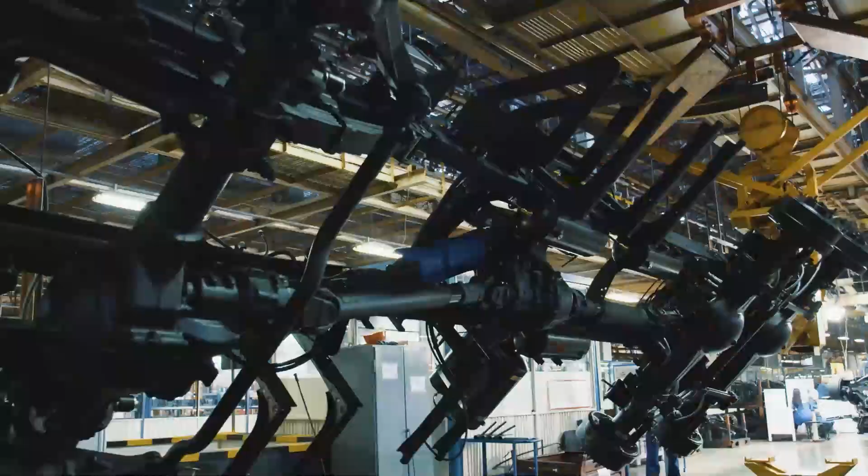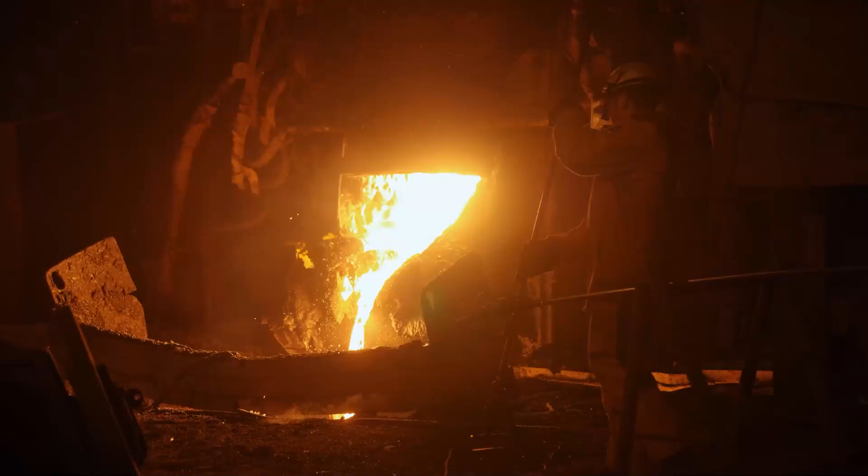In the world of today, steel products are used by many markets, from automotive to bridge and shipbuilding. Our Earth provides raw materials for those steel products. Through several stages, these materials are turned into basic products such as beams, plates, and tubes. For durable and reliable constructions, these products must be processed as well as protected against corrosion.

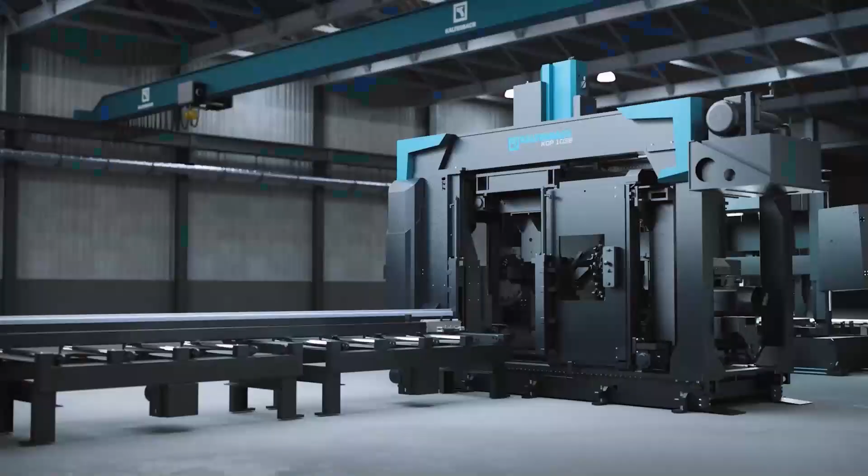To do so, KALTENBACH supplies integrated, high-quality solutions for the steel industry. May we present KALTENBACH and its solutions.

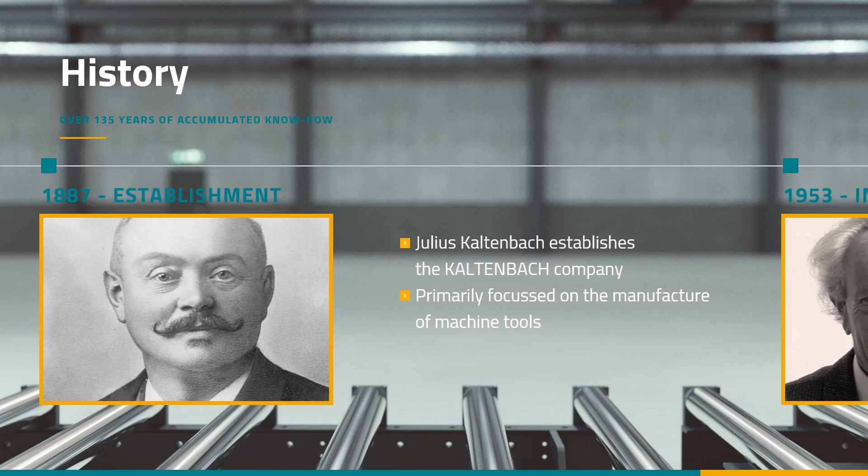History. KALTENBACH was founded in 1887 by Julius KALTENBACH. 135 years of history in the steel business, with no compromises in durability from day one.

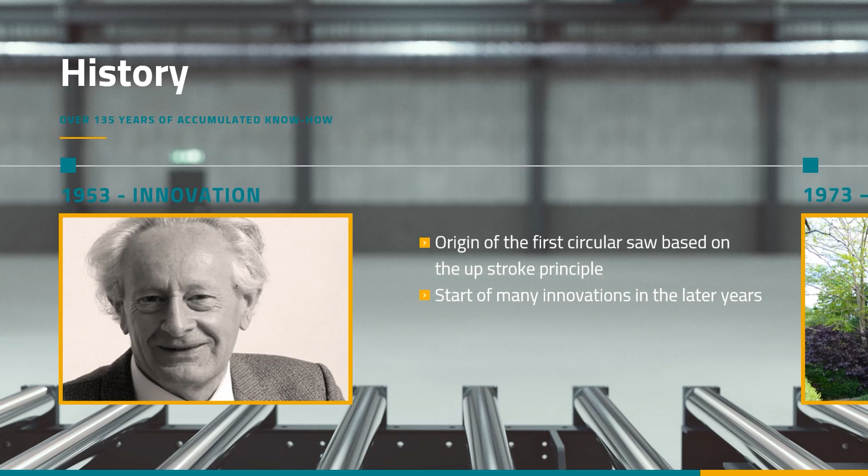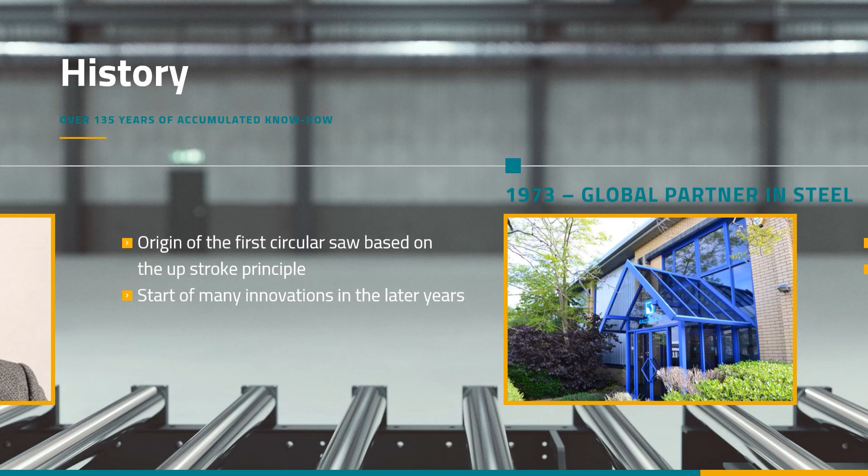In 1953, KALTENBACH evolved as an innovator, which began with the creation of the first circular saw to use the patented upstroke principle. It was the start of many innovations for the steel processing industry, from drilling and coping to

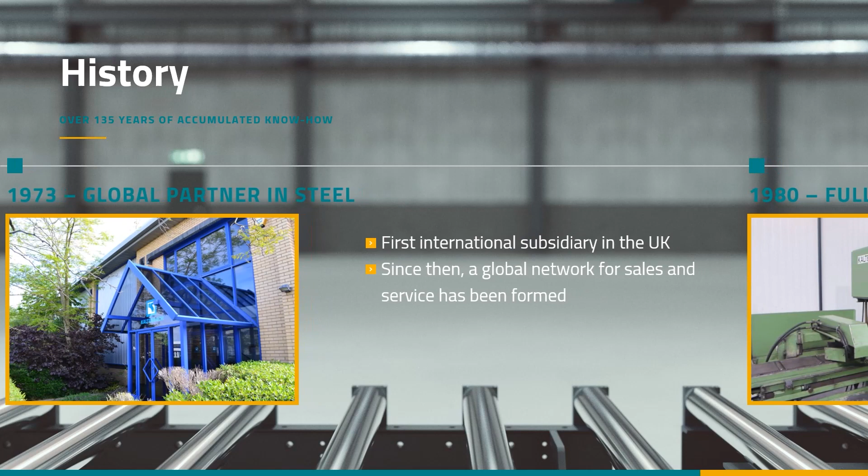shot blasting and painting. In 1973, KALTENBACH established its first international subsidiary in the UK. This has grown into a global network for sales and service that enables KALTENBACH to serve its customers around the world.

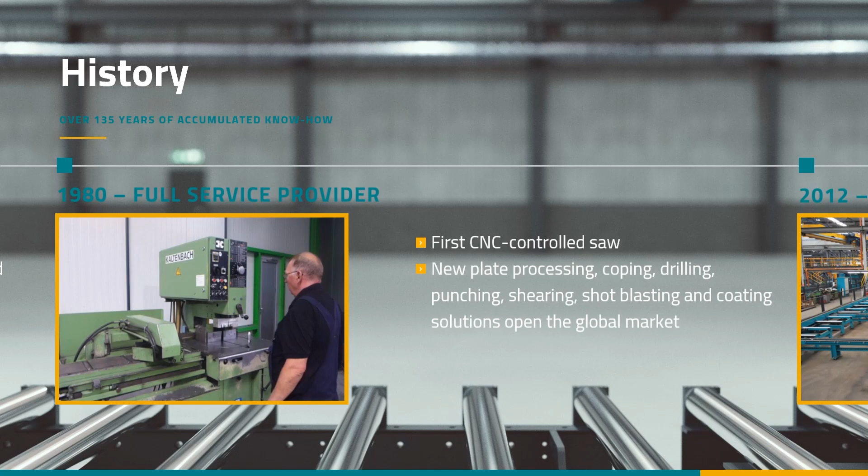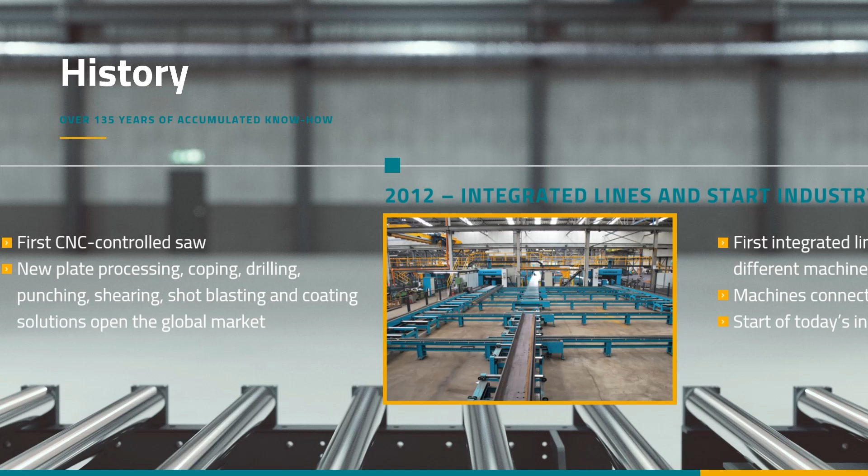In 1980, KALTENBACH became a full service provider by creating products like the first CNC-controlled saw. New solutions for plate processing, coping, drilling, punching, shearing, shot blasting and coating opened up the global market.

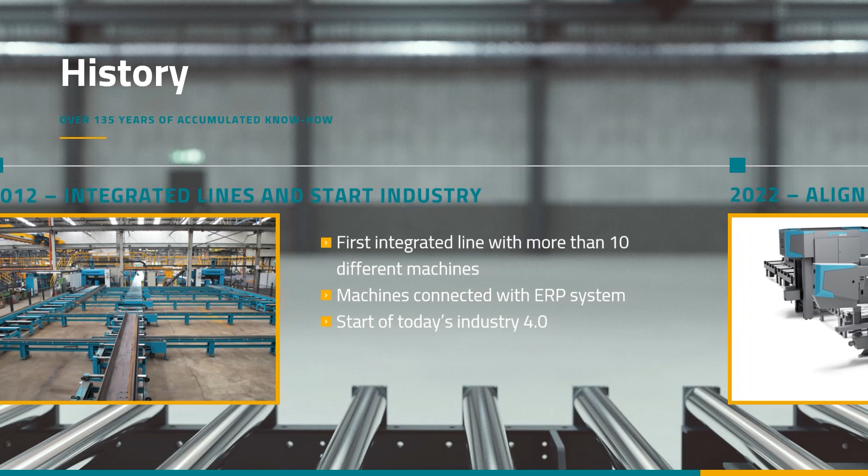In 2012, KALTENBACH delivered the first fully connected systems which could be integrated into the customer's ERP systems. These game-changing production lines allowed customers to process steel fully automatically. KALTENBACH was ready to partner for the future.

We wanted to modernize as well as improve our machines, durable and robust, with considerable savings on energy and consumables. Our goal is sustainable production at the lowest possible operating cost for our customers.

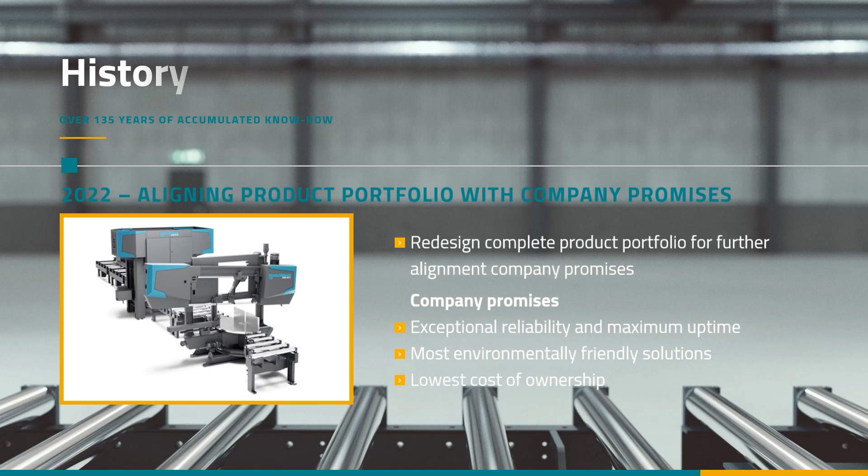Our specialists in Lörrach and Hengelo, as well as our sales centres and partners, are ready to offer advice and support all over the world. We are there wherever you need us.

Over the years, KALTENBACH has become a technological leader and innovator, known for its powerful solutions and passionate people. Processing steel is our pride. We are driven to protect and guarantee the quality, reliability, and durability of our customers' products.

Every day, we continue to improve the sustainability and reliability of our products. Our drive and pride is to process steel and to protect and guarantee the quality, reliability, and durability of the products of our customers. Every day, we continue to improve sustainability and reliability in all aspects.

With the help of our passionate people, we promise that our solutions are exceptionally reliable and have a very high uptime, are the most environmentally friendly, and offer the lowest cost of ownership.

Markets. At home in your industry, the individual opportunities in the steel industry are essential for the success of your business. From automotive industry to crane building, from locksmith shops to steel service centres, our experts know your business and the challenges you have to face every day.

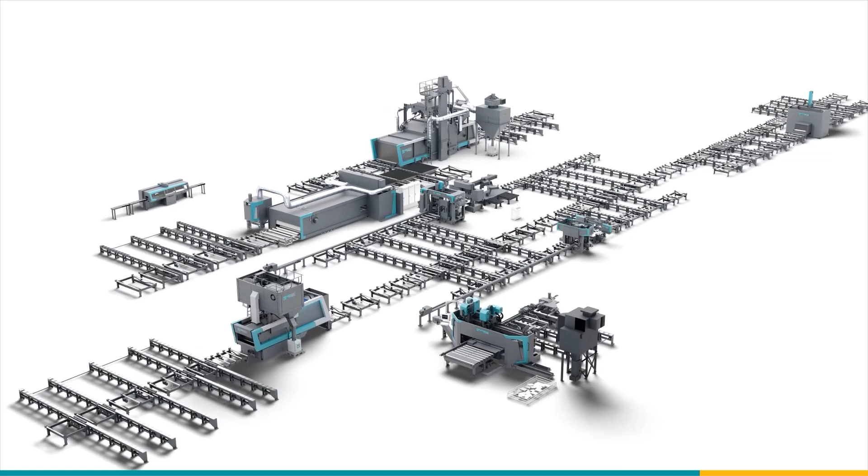KALTENBACH's drilling machines offer the highest drilling performance, delivering efficient and accurate milling of notches, chamfers, slots and pockets. Thanks to its powerful drives, high torque and fast rotational speed, you'll be getting the very best KALTENBACH has to offer. Perfect drilling and machining.

Benefits include the highest processing performance in its class, with its 500mm sub-axis for parallel processing. Complete processing of material and lowest cost of ownership guaranteed.

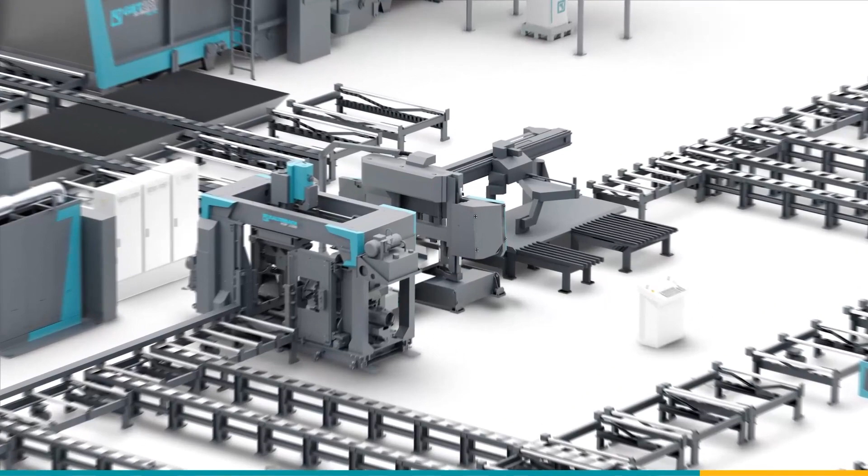From straight, miter to multiple overlapping saw cuts at different angles, KALTENBACH will have the perfect saw for your business. Fast and reliable sawing.

Benefits include state-of-the-art cutting performance combined with auto feed control technology for fastest cutting with longest tool life. KALTENBACH's bandsaws offer the lowest cost of ownership and are Industry 4.0 ready.

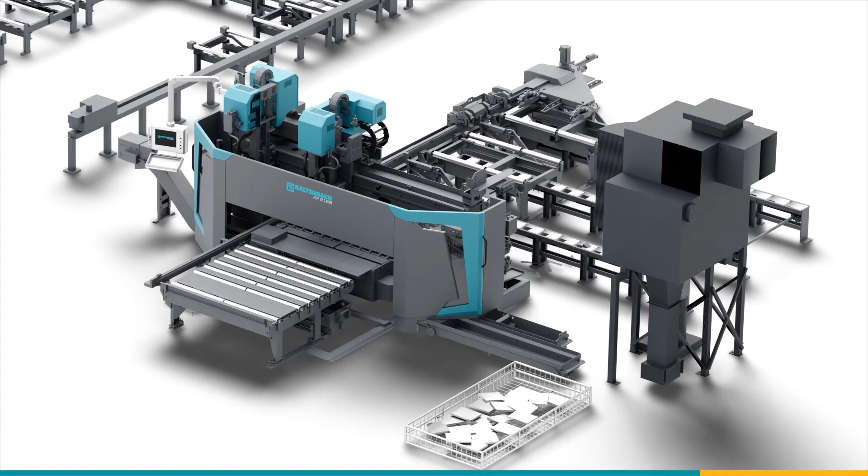The KF series offers multiple technologies in one machine, giving you the freedom to produce your plates in the most efficient way. The high level of automation of KALTENBACH's plate processing machines will boost your productivity and profitability. Advanced plate processing.

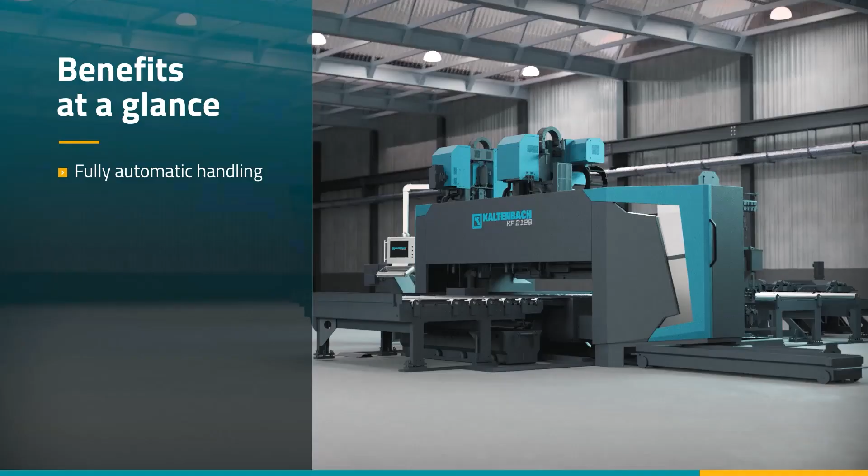Benefits include fully automatic handling, making the KF series highly efficient and suitable for cost-effective production whilst offering maximum performance and optimal cutting quality.

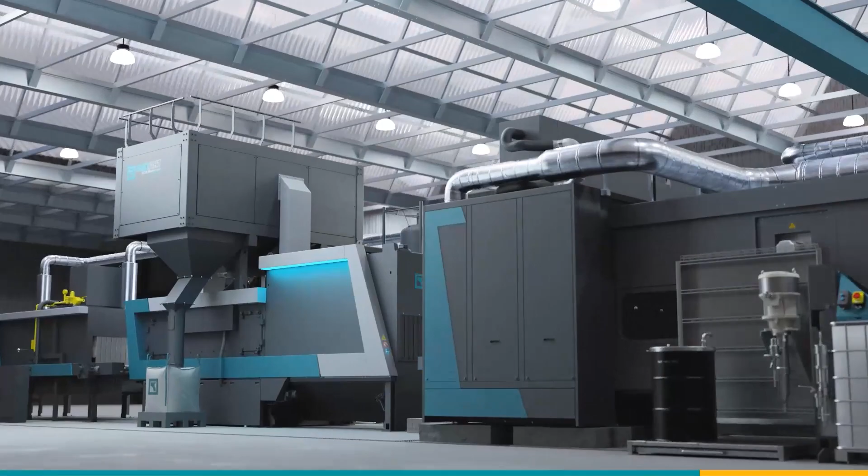The EcoBlaster is your perfect companion for efficient cleaning of plates, profiles and tubes. Efficient cleaning of steel products.

Benefits include optimal blasting and cleaning results with integrated noise protection that is rated below 80 decibels. The EcoBlaster provides up to 40% energy saving and is Industry 4.0 ready.

Do you want to supply an attractive, finished product to your customer? We are able to deliver high-end spray painting solutions for primer and top coating of steel constructions.

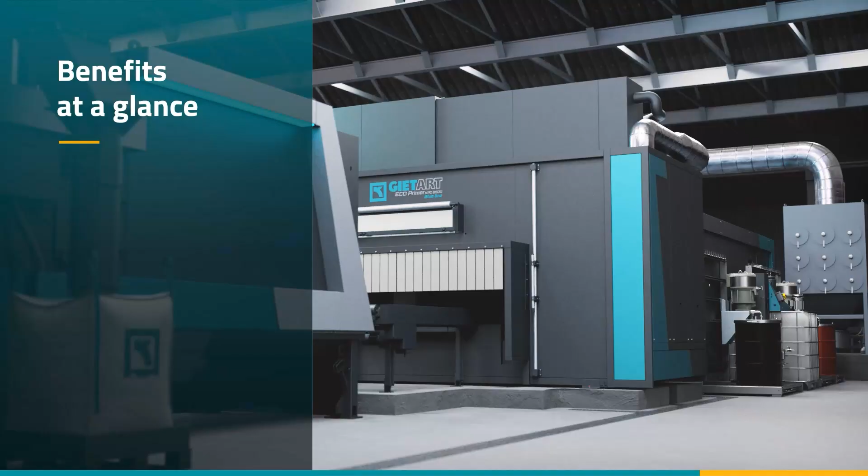Innovative painting technologies. Benefits include minimum overspray thanks to its unique airless spray guns and high-quality finishes, setting the standard for consistent coating and energy-efficient production.

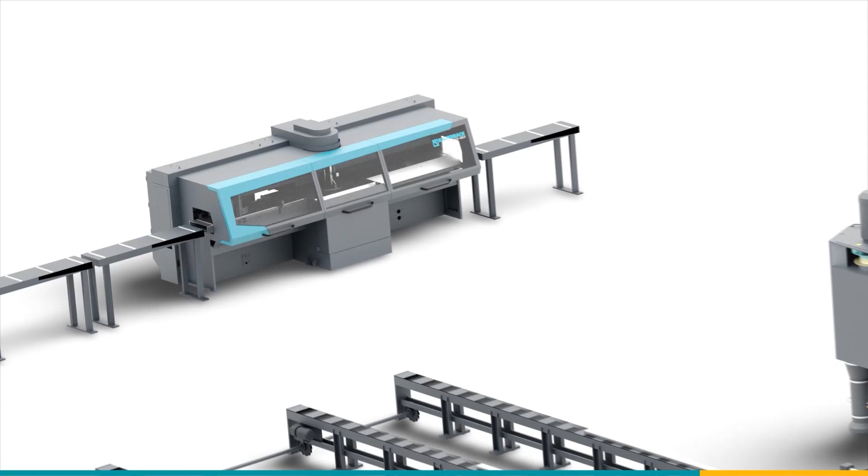Realise optimal productivity with reduced cutting and cycle times with KALTENBACH's circular sawing machines. Available as semi or fully automatic and suitable for steel and aluminium.

Top level sawing. Benefits include fully automatic unmanned operation and automatic cut-off sorting, suitable for straight and mitre cuts. The KKS 463 offers a remnant length of 10mm together with a magazine for material storage.

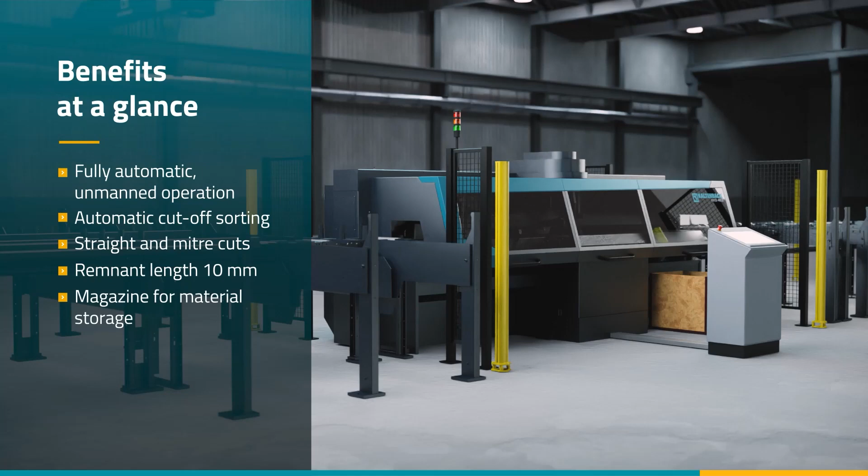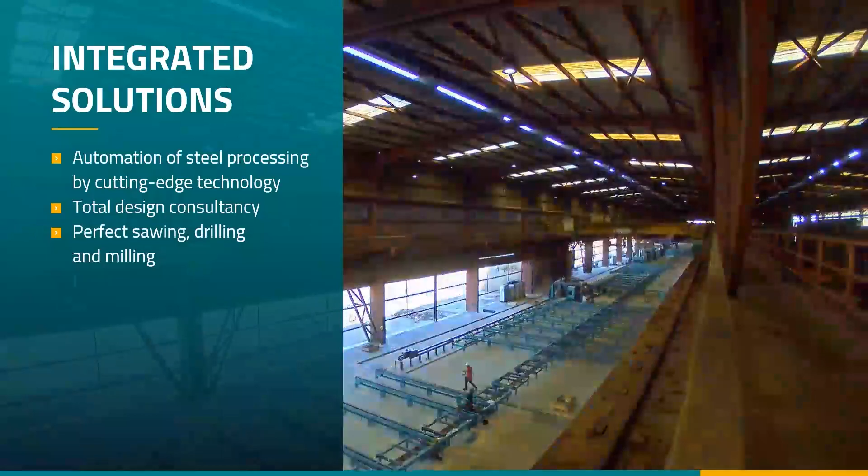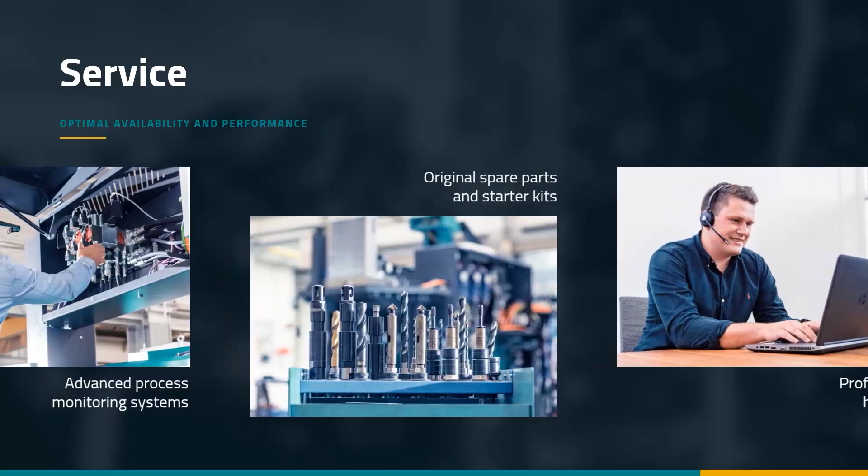We are the experts in steel processing and surface treatment. Our custom-made service solutions guarantee that you benefit from optimal performance, availability, and continuous high-quality output of your investment. Together with our partners, we keep your solutions up and running with optimal performance.

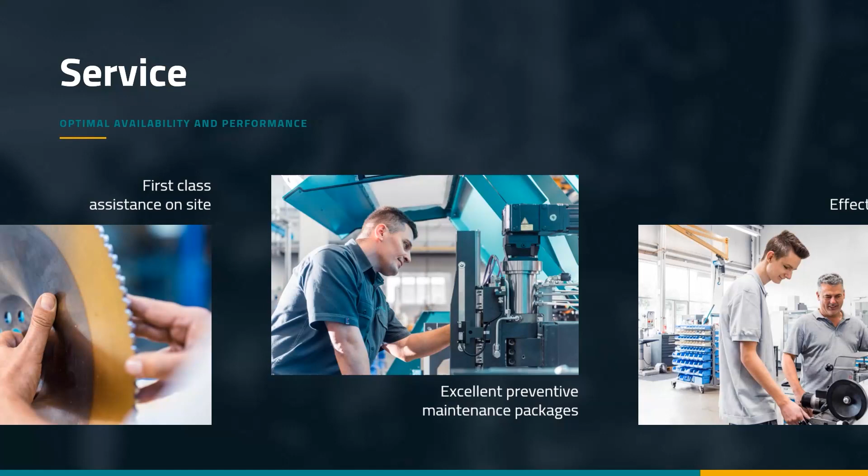Our clear project approach guarantees a smooth project execution. It starts with a clear scope of supply and functionality, including interfaces. We take care of the entire process from engineering and manufacturing to installation and commissioning.

Our project manager is with you every step of the way, from the first approval of the project up to the site acceptance test, handover and production optimization.

Convince yourself of the knowledge of 135 years of experience. Powerful solutions, passionate people.